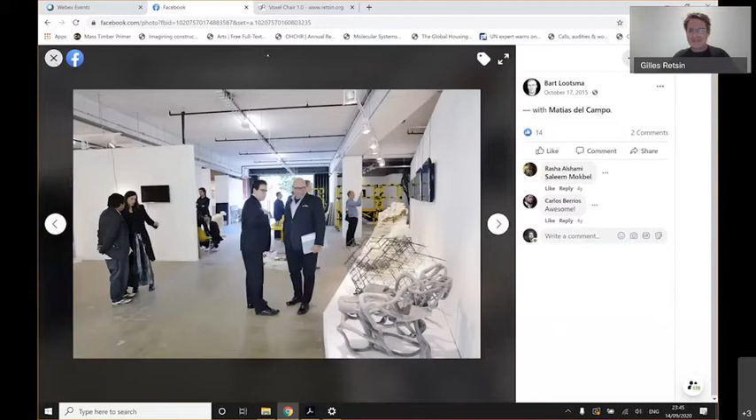So anyway, the talk today—I'll just go into full screen. I'll set a timer so that I don't keep you forever. I mentioned to Evan before that usually when I go to the US, I'm extremely jet lagged by the time I have to do my lecture. This is almost the same—it's like 12 o'clock at night in London. So similar vibes, a lot of coffee.

The title of this talk is just Discrete Architecture. I was thinking about other titles, but ultimately that's what I want to discuss with you—that premise of Discrete Architecture that Evan just brilliantly summarized. I made a whole sheet of notes: sublime incompleteness, hyperfigurative objects—nice terms. The lecture is split into three discrete blocks: the first, Great Expectations; the second, Irresponsibly Naive; the third, 99%. Roughly speaking, the first chapter is about architecture, the second is about technology, and the third is about the socio-political premise.

Usually my lectures are the reverse—I start with almost a cross-section of the current context we inhabit, explaining where the work comes from and what it promises, and then I show the work. And then usually I run out of time and can't talk about architecture in detail. So for this opportunity, I've switched around my lecture for the first time. We'll start with a kind of architectural journey, and I'll try to go into detail there. Then we'll talk about technologies, and then the premise. So this is an experiment—we'll see how that goes.

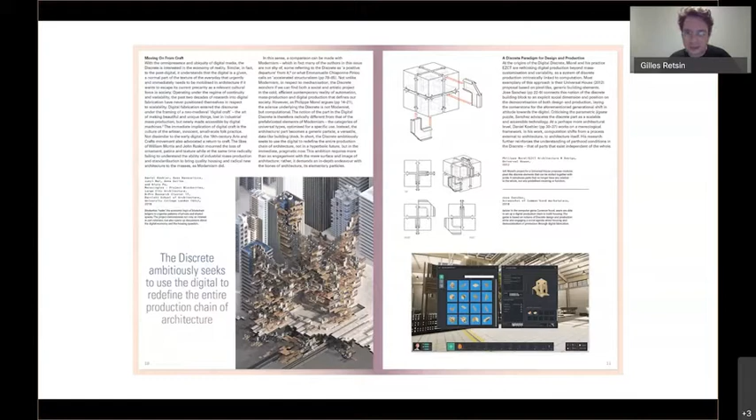So it looks chunky, it looks maybe fuzzy, it looks blurred. There are definitely no continuous surfaces. There are no defined superforms. It's maybe a bit moody and a bit dark as well, all in the opinion of Pinterest. We see also work here of other practitioners like Casey Rehm, who I believe was also for a long time at RPI, now at SCI-Arc, or people like Daniel Köhler.

I want to start to give a few tools to understand what the discrete is and how we should discuss it. You could understand the discrete purely from a data perspective. It's a mathematical idea of how to organize data. Analog data is continuously differentiated. It has no parts. The equivalent would be an analog clock where a mechanical dial moves around in a circle. There are no precise digits, but it continuously differentiates. It's analog. And then the digital is data that consists of discrete bits.

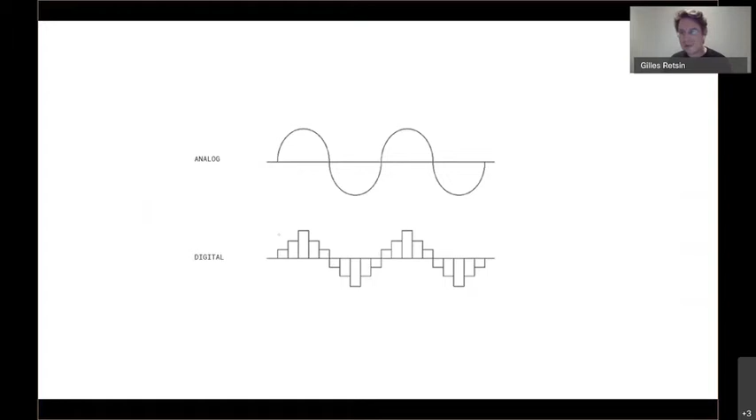So the digital and the discrete are inherently linked. Not everything discrete is digital, but everything digital is based on discreteness. So that's maybe a very boring slide to start with, but I think it can take us quite far. Of course, it's an absolutely naive and perhaps stupid idea to try to divide all of architecture into two polarities, being either discrete or continuous. It doesn't really make sense to do it, but a lot of these things are productive to do.

The discrete and the continuous, I think in architecture, that debate has always been there. It's a fundamental issue. It's not a radical dialectic. Depending on how you look at and analyze projects, you will always discover a relationship between the discrete and the continuous. But just for the sake of the polemic and the argument, we are going to do a very polar division in architecture. We'll divide it in two parts.

It will be either continuous or discrete. So what you see on the left is a typical example of a continuous analog building. Beautiful shell by Felix Candela. This is a building that consists of one part. It's therefore also just a whole. It has no subcomponents. It has no parts. It's cast in concrete, right? So it's just a kind of one large object that you create.

It's also finite. It's completely defined by a finite superform, and it cannot ever expand. It's completely finished in time. It can also not ever be partially built. You need to build it all at once because it needs that kind of superform to hold up from a design perspective, but also from a structural perspective.

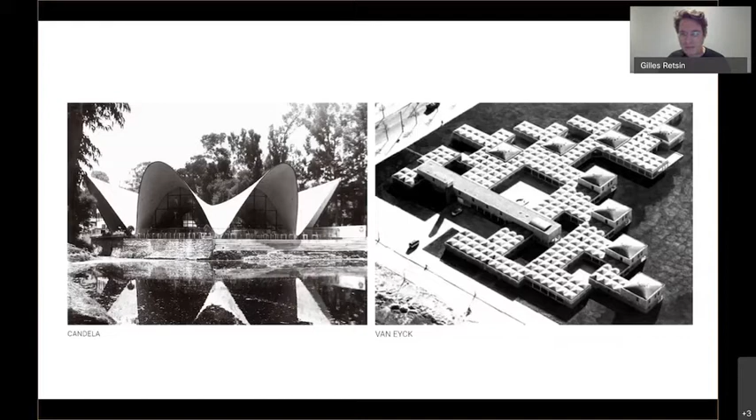The building on the right by Van Eyck, the orphanage, is a very different building. That's a building that is discrete. It's not digital discrete, but it's a discrete building. It consists of parts or modules that aggregate together. And the building, you can easily imagine that it could expand over time, that it could contract. You could even maybe disassemble it and assemble it in another form on another location. Both, by the way, key buildings from the modernist era.

But you could also go further in time. And I kind of made this up first as a bogus argument. I never did research into these arguments, but I made up this argument that architecture in the West had been traditionally continuous because of the fact that it was largely built out of stone. Stone is very heavy. So the only way you can create larger holes with stone is if you rely on geometry and form. If you want to build with stone, you need the form of the vault to be able to build in stone. And then you can of course go to the Gothic, etc.

So I launched this argument to a proper architectural historian, Mario Carpo, who then promptly told me that I was right. So this is now an official historic argument. And these are just some more subtle hints, traces of discreteness, just to show that the idea is so fundamental and so old.

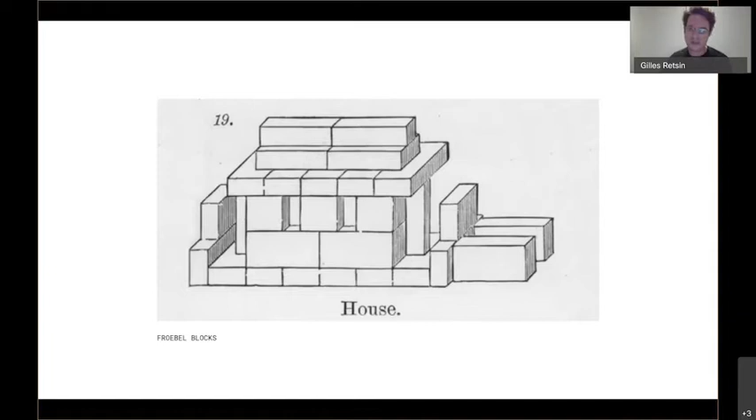Of course, Frank Lloyd Wright, you probably all know the textile block project, which in a way is also a nice precedent for the discrete, because it consists on one hand of a series of extremely beautiful and unique villas, but at the same time had the premise that it could become a construction system also for larger groups of people, and that other architects could get their hands on these blocks and also design with it.

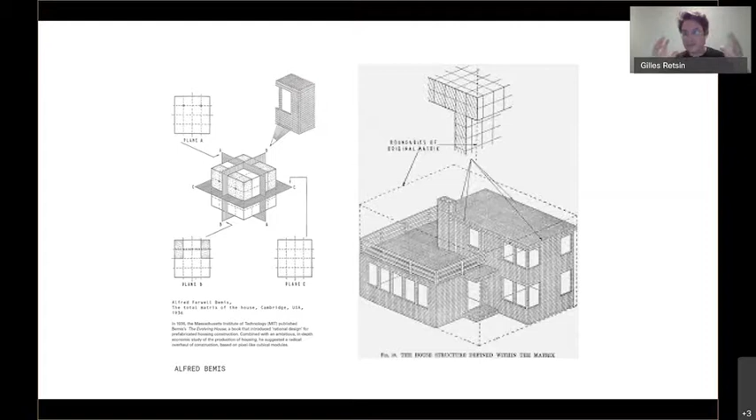There's also more obscure references like Alfred Bemis, who was a kind of crazy scientist operating at MIT in the 1930s, who wanted to standardize all of architecture based on a cuboid, or a voxel we would say today, and developed these super interesting voxel-based construction systems. Then more recently, people like Philippe Morel, who already in the early 2000s designed this Archizoom, Bemis-like universal house that consists of pure pixel-like modules.

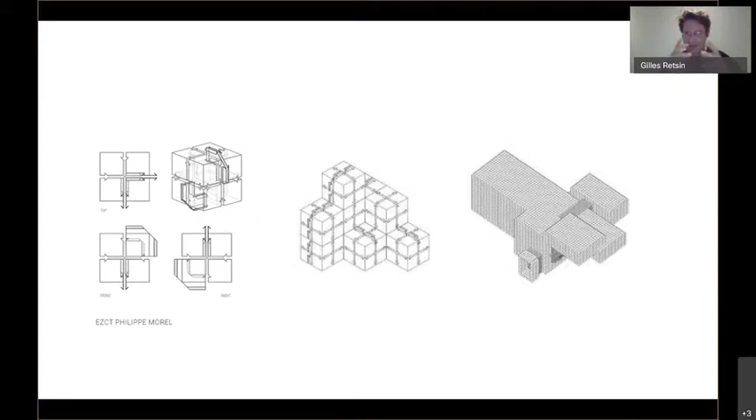This is the more vulgar explanation maybe of the discrete. So if, as a child, your parents would have given you toothpaste to play with instead of Legos, then you would operate in a continuous analog paradigm. You would be extruding toothpaste to build little towers or little structures. You would be operating in a continuous space without parts, and you would always be constructing a single whole. If your parents, like probably most normal parents, would give you Legos to play with, you would have operated in a digital paradigm, actually.

Even as a small child, you would have been confronted with the digital discrete, because Legos have a limited set of connection possibilities, almost like precise bits and pieces. You can only position them on those limited connections. And every structure you would have built with Legos would always be in part-whole. It would always be a kind of incomplete whole. You would be engaged in circular economy. You would be assembling and reassembling your Lego blocks, and you would be developing design paradigms on top of these Lego blocks. That would be your unique position as a child.

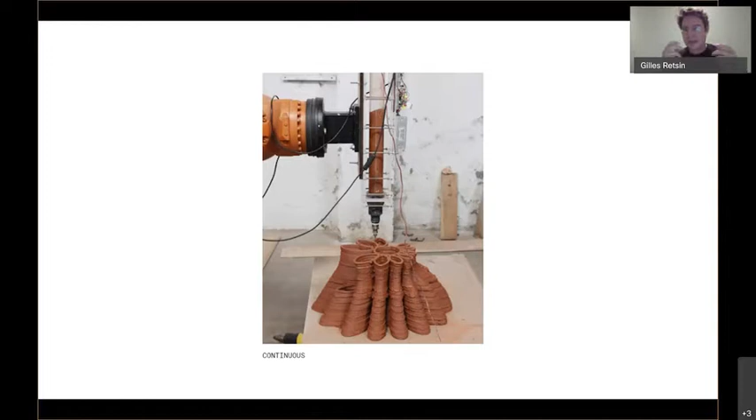Ultimately, just as Felix Candela's shell that we were looking at in the beginning, this model has a final state. It can never be reassembled, or we need to break down the clay again to its basic particles. And this is a bit of a confusing one, and one of the last ones I want to show. You can try to guess with me, is this now discrete or is this continuous? So it's a brick wall assembled by robots. It consists, of course, of discrete bricks. However, the final outcome is actually continuous.

Now, why are we talking about these things? And that's maybe the great expectation. The interesting thing is that while discreteness and parts have been around in architecture for ages, along with the conversation on modularity, or the disciplinary discussion of part-to-whole relationships, we have never really thought about part-to-whole relationships or about architectural parts in a digital way. So we have worked with discrete elements, but we have not necessarily considered them as digital parts. I will explain a little bit further what that actually means. But that is an exciting discovery.

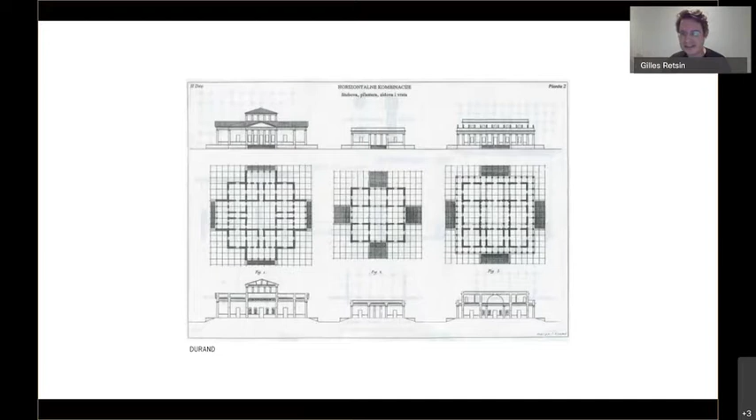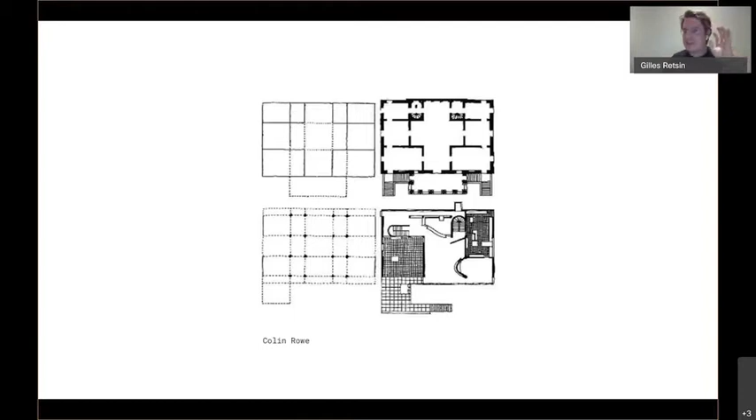Because in a way, it's a creative question. When Colin Rowe, in his famous essay, was analyzing Villa Stein by Le Corbusier and comparing it to Palladio's villas, he was making the argument that we had never been modern. That actually Le Corbusier's villa was just a white stucco or concrete version of Palladio's villa. We were still relying on the same geometrical grids, on systems of proportions, and on elements that had specific functions like columns, walls, grids, etc. So fundamentally, we had not yet been modern. We had not been able to separate form from function, which then, of course, Peter Eisenman's career was founded on: the attempt to disconnect form from function and to break that modernist assembly.

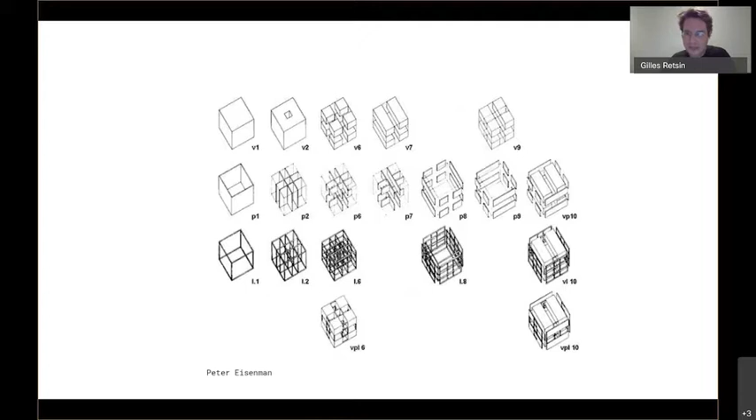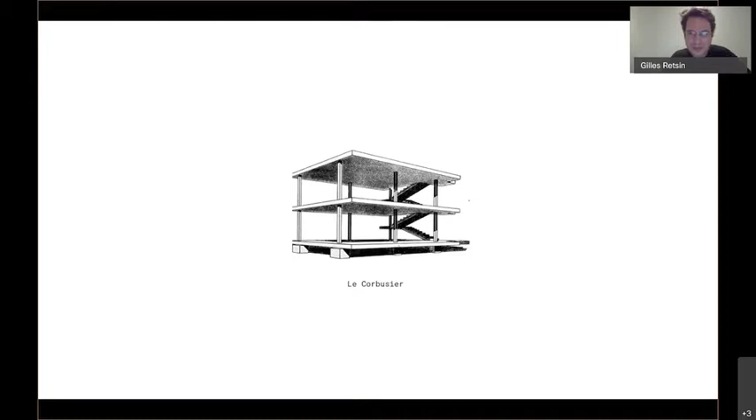And that is interesting because in many ways I have been obsessed by this model, Le Corbusier's Maison Domino, which is extremely resistant and extremely difficult to get rid of, right? This original model, which we could argue is not even modern, is still persistent in architecture. And there are reasons for this. This is another one of my made-up blunt histories that are very wrong, but also I think entertaining.

So this diagram is showing the entire history of architecture, at least in the West, where if you look really far back, you would be in a pure assembly of parts, and then you would be in a moment where you would be stuck in stone construction between solid walls, and it would all be based on the wall. And then what the Domino did was flip that inside out. Like I always say, the Domino flipped architecture inside out. It got completely rid of the wall and everything became about the floor.

And that persistent model is still there. It underlies still most of our architecture today, or it affords us to do what we do today. So this is another one of my historical diagrams, which contains architecture history in the last century, where you see the domino, and then you see the attempt to get rid of the domino with postmodernism, where we try to diffuse the domino with figurative elements.

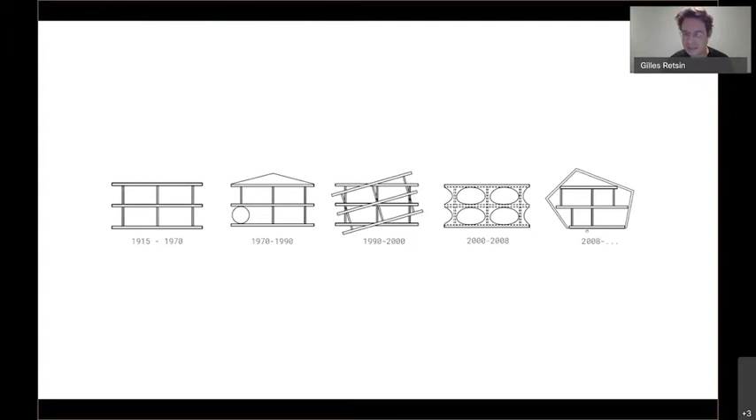Then we see Peter Eisenman's attempt, the decon attempt to get rid of the domino. Then we see the parametric attempt to get rid of the domino, where we clad it with curved panels, to give the impression that the domino is gone, but it's still lurking behind the surface. And then maybe a more recent one, very much in the US actually, the triple O object-oriented ontology paradigm, where we try to make a building appear as an autonomous object. But again, if you look on the inside, we'll see that it's afforded by the domino and sliced into a series of layers.

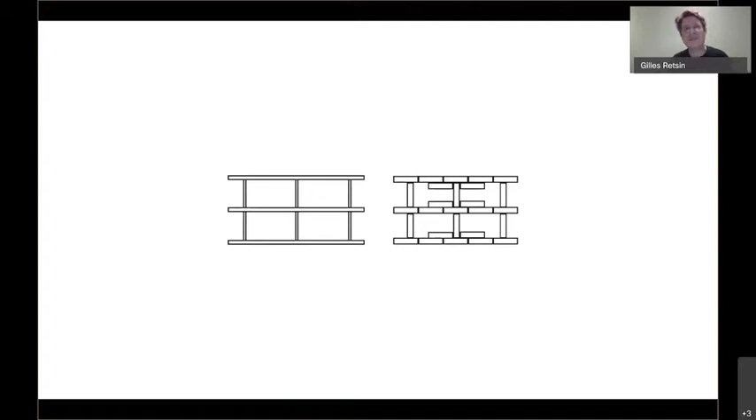And that is, I think, if you look at all art and maybe literature, what happens. There are great expectations at the moment that something reaches its high point, its technical summum, then a next generation would dismiss the expectations and the description of that technical summum. For example, in high Beaux-Arts painting, they would paint the most technically perfect and incredible paintings, and then someone like Cézanne or early generation impressionists would come along and dismiss the entire technique and just rewrite the rules.

So that was a little bit the attempt in architecture, to do this shocking move to say that it's not anymore about form, it's not anymore about the super whole, it's no longer about geometry, it's no longer about mass customization. From now on, it's only about parts. And that's the diagram that shows the discrete, and it's deliberately a provocative diagram, where we have a series of parts that are all the same. They don't have any function or precise meaning, and are articulated in a form that looks quite similar to the domino. Yet the argument is that this is not a domino. The argument is that this stupid diagram is more radically different than the domino than any of these attempts.

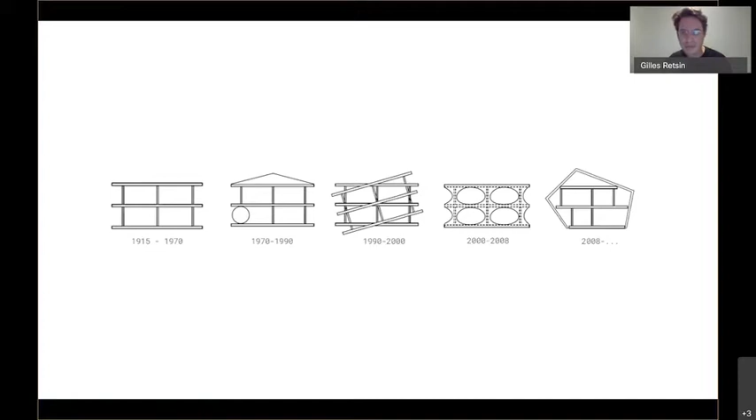All these attempts have never managed to get rid of the domino. They've tried to diffuse it, they've tried to hide it, they've tried to wrap it into objects. But actually, this attempt gets rid of the domino. There is no more domino. There is just an aggregation of parts that are always repeating parts. There is no floor slab, there are no columns.

I don't know if you can see my mouse. Can you see that little mouse hand? Otherwise, I need to describe that.

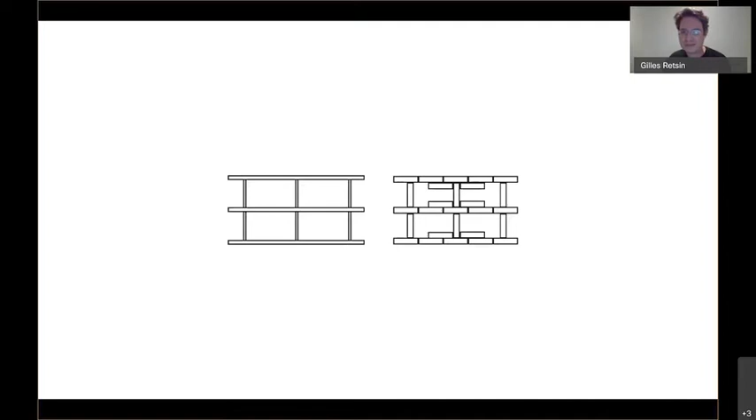But anyway, the column that you see here is not actually a column. That is actually the same element that appears here in the horizontal plane. So ontologically speaking, everything in the diagram on the right is different from what you see on the left. So we got rid of the domino. So that means that we need to design. The premise of a digital discrete part would be that the part has no prescribed function, that it always remains autonomous, and that it never derives its position from a super whole. It will always derive its position just locally, and it will always remain discrete and autonomous within an assembly.

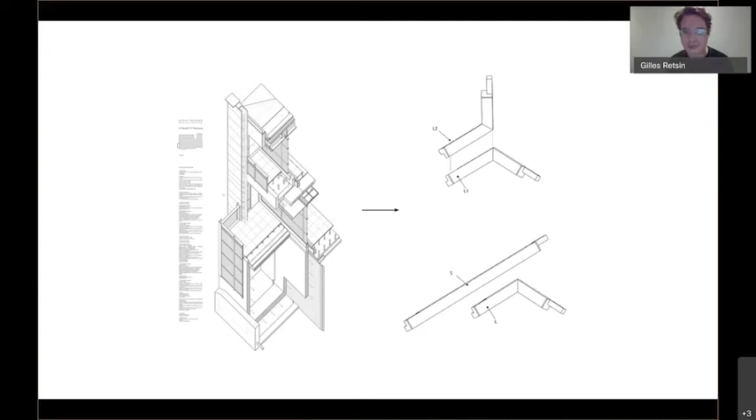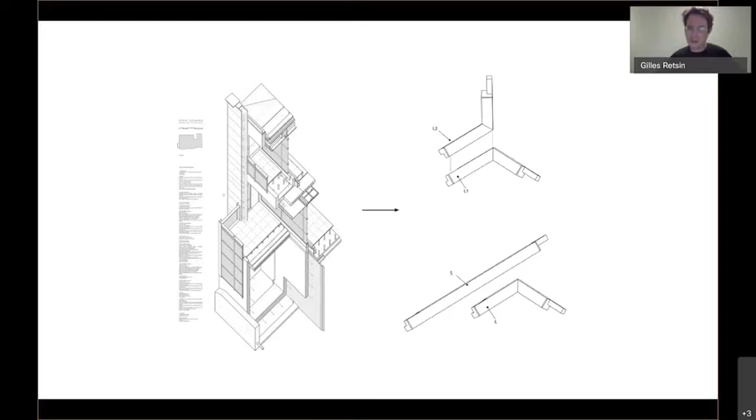And the premise is then basically that while doing that, on that journey, you could get rid, and we'll talk a bit more in the next chapter on technology, you could also then get rid of this kind of terrible world that the Domino has brought us into, right? So the Domino has flipped architecture inside out, and it has given us a world of commodified building elements, of curtain walls, of commodified, terrible PVC window frames, and a building industry that is an incredibly slow and old-fashioned world. But more about that later.

So what does that look like? It could look like this. So this is the first project that I started working on that approaches the discrete. That's in 2015, if I remember well, so roughly at the same time as the chairs that we were looking at. This project is called the Stone Villa, and it consists completely of repeating arrow-shaped elements. And it was a kind of naive premise, basically. It's a project in Belgium.

It started out with a former classmate who became a climate consultant and therefore earned a lot of money. He approached me and was like, I don't know what to do anymore as an architect. Can you please design a villa for me? And he was asking it jokingly, because he knew that I had just graduated from the AA and was teaching at the Bartlett with robots. So it was more like a teasing question rather than taking it seriously.

So I was like, yeah, sure, we'll give you something, and essentially the argument was it will be based only on a hyper-rational argument of a single repeated part. You will not actually have to pay for any crazy customization. We'll just prefabricate that one part, we'll aggregate it, and you will have your villa there. So we made this huge model. We cast a few thousand of these pieces.

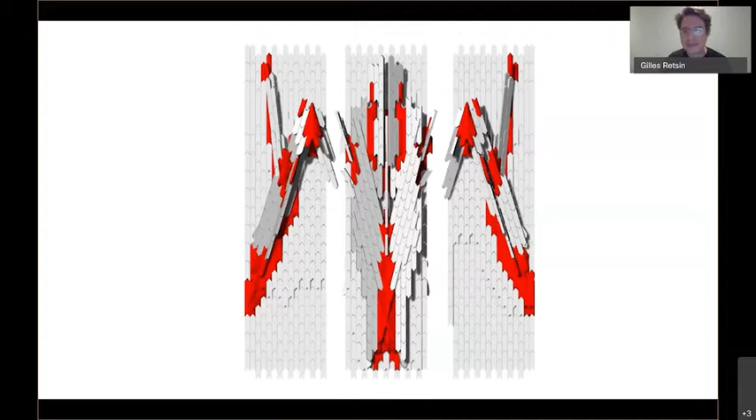And the argument was then that everything that you see here in white is that repeating part, this repeating arrow element. Everything in red are customized zones. So it wasn't entirely as radical yet as it could be. The argument was, look, 90% are these white parts, and you will have to pay a little bit extra for these 10% zones that maybe we need to customize. But ultimately, it's a very rational proposition.

So these repeating elements would come together on these customized parts, which still, by the way, it's more like a complex Lego in a way, they still use the same modular connectivity, but they allow us to switch or flip grids. So this is one of these strange chunks from that model. This is Nathan and Manuel working with me on establishing that massive model in the office.

And then the resulting architecture is something that is still, I think, until today driving my practice. And that's why I really start with this project, because I think the premise that this model contained is really powerful. It showed that you could work with seriality and with serial repetition, but that you could push it away from the boring, modular, hyper-rational and cold project that normally we associate with modularity and seriality.

It showed also that you could bypass geometry and topology and surface, but that it could become volumetric. And aesthetically, I think, it shows something that is assembled yet organic. It has a natural feel, yet at the same time it's also assembled. So that for me was as a proposition really interesting. I absolutely had no clue how to build this. This was also a pure naive exercise.

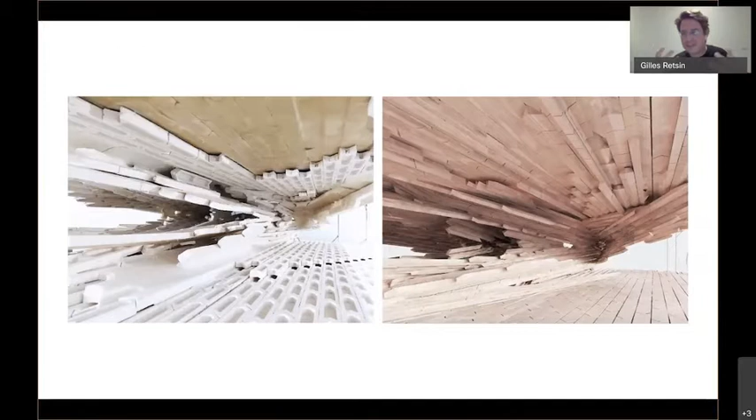Ultimately, we had to add a layer of carbon fiber, of glass fiber, on the model to make it hold up, because we were constructing a horizontal brick wall, which is an embarrassing stupidity as an architect to try to do, obviously. How can you stack bricks horizontally? That just doesn't work. So we had to add this layer of glass fiber, which obviously is continuous, in order to make this stand up.

However, despite this kind of criticism, I think the office has tried subsequently in the next few years to make this happen, to build in a way on this proposition of that image. Now, one of the benefits of that discrete project is that, of course, this villa did not get built, and ultimately the client decided to build another project. But then we could also play around in the next series of projects with the same parts.

So this is a museum at the Karlsplatz in Vienna, which we did as a kind of provocation for the competition, not seriously with the premise of wanting to win, but more as an exercise to explore how the design principles could scale up. This plays the same game in that we have a familiar form of the slabs, which is also a provocation, that there's no interest in curvilinear, topologically complex space. This is a very boring building, one that consists of 3 horizontal strata, but all of the qualities are derived from the interaction of these parts.

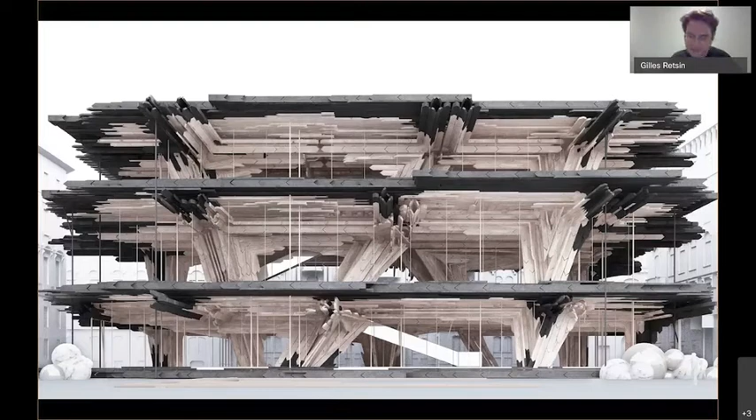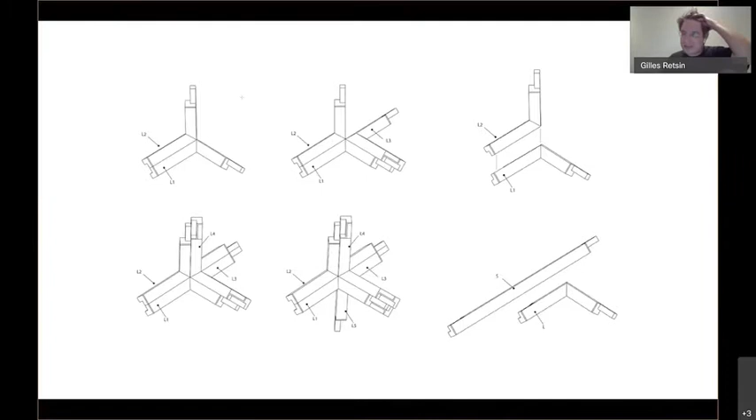And then ultimately, of course, we didn't do that competition, so you could do a table as well with the same element. And then the next project, which I think is probably the one that keeps the practice going intellectually and creatively, was also done in 2015. That was a proposition for a multi-family home in Belgium, basically 3 apartments stacked on top of each other. The idea here was to really do a proper discrete building.

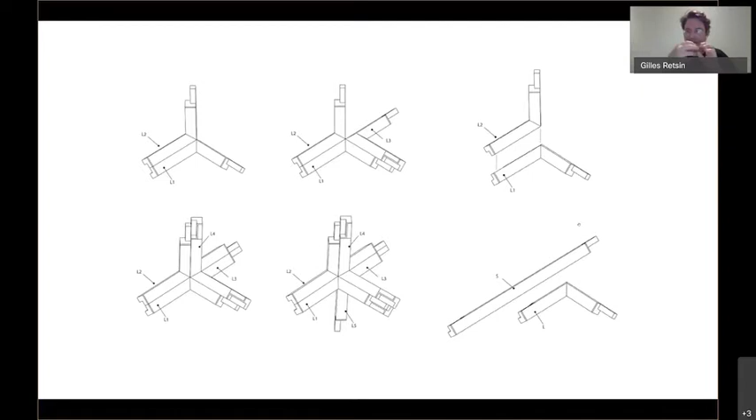So we would not use any additional materials such as glass fiber or tension. We would actually begin to think about how this would structurally work. We would not use any customization. We would really just build the entire building out of an L-shaped part and a straight bar on 3 different scales. So this is the project that came out of it.

And again, there's a kind of argument here, and I think Evan hinted a bit that it's a very different argument from the continuous project, in the sense that this looks excessive, but it is not excessive. It's highly, highly economic and rational. It's a purely modular project that only consists of repeating parts. They're not actually materially excessive. These parts are hollow on the inside. They consist of thin timber sheets. So it's not that there's an enormous amount of timber in the project.

It's actually relatively lightweight, and a project that is ultimately really boring. So it's deliberately articulating itself almost as a kind of domino, a stack of 3 horizontal strata that are then materialized with this cold and relentless repetition of the smaller elements. The small elements remain always autonomous. So when we look at this, we register this figural aspect of these parts, like we're looking at the L-shaped patterns that they create. It suggests almost a building that you could call an incomplete whole, but I don't like that term so much. I would say it's more like a part-whole, like it's never fully complete.

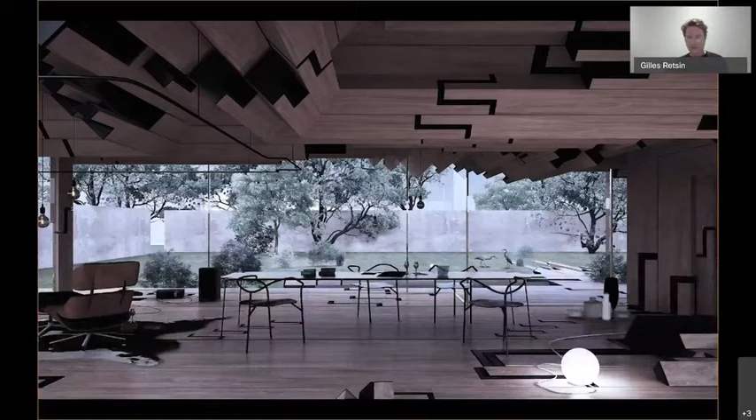It's not, we could easily add or remove another part. We could maybe imagine that it could expand a little bit further. It's very fuzzy in its definition. It has no facade, it's very sectional almost, it's almost like we've sliced it. It has a very strange quality to it, that when you look at it long enough, you understand the rationality, yet of course it's beyond normal expectations. And these are some of the interiors of the project.

I think that also reveals a few other interesting aspects. I would actually argue that this space is phenomenologically continuous. So while it consists of discrete elements, it is actually a continuum, although it's not curved, but it's a continuum in the sense that it's a repeated operation of the same part. You have the same part in all directions where you look. It's in the floor, which is not actually a floor, it's just an aggregation of parts. It's above your head - in my projects there are no columns, there are no beams, and no ceilings, but we don't have words for it, so I have to say it's in the ceiling. However, there is no such thing as a ceiling. It's just a series of parts.

And what it also does, in terms of inhabitation and domesticity, is give a little bit the impression almost as if you would be in a forest or a cave and you go camping and you domesticate the space. So there is nothing in this space that caters to human inhabitation per se.

It's absolutely dysfunctional. This is not a functional space. The elements have no function. A floor has a certain function, a column has a certain function, a wall has a certain function, but these elements have no function. It's only after their aggregation that you could say they maybe establish functions as an emerging property, but in themselves they have no function.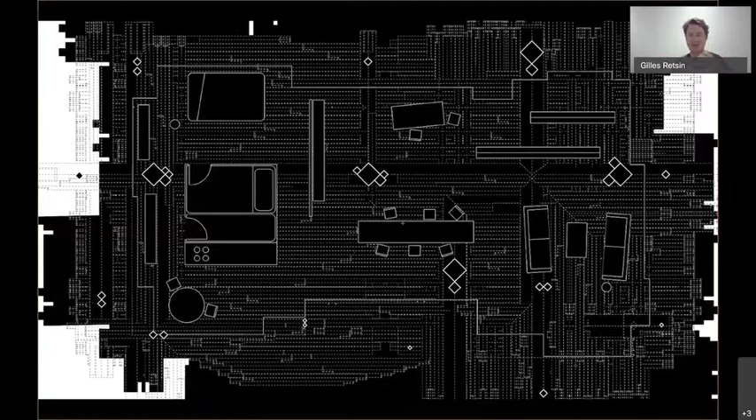You can see also in the plan the kind of loose plan. There's just a kitchen volume here that contains the bathroom, the kitchen, toilet, and then the rest of the space you could organize however you want. There is no kind of functional premise from the top down in how you need to inhabit this space.

This is the plan, how it sits between the walls of the garden, and it becomes this very blurry black object that is between a reflected ceiling plan and a figure, and it kind of disappears in the garden.

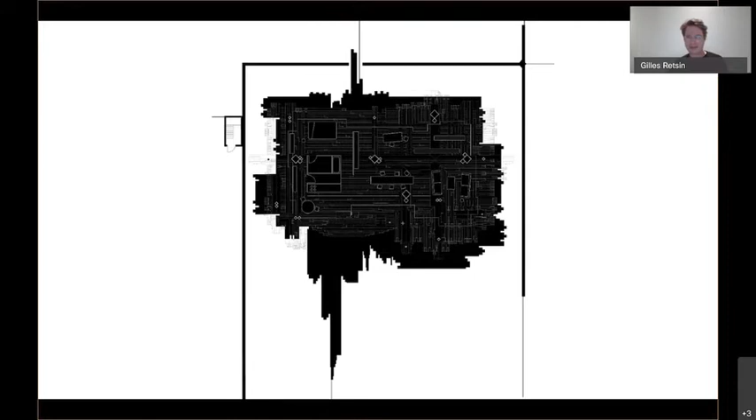And you can read it as doing this primitive move, wanting to construct a horizontal plane and a kind of column-like element, yet there is never, even structurally speaking, such a thing as a column.

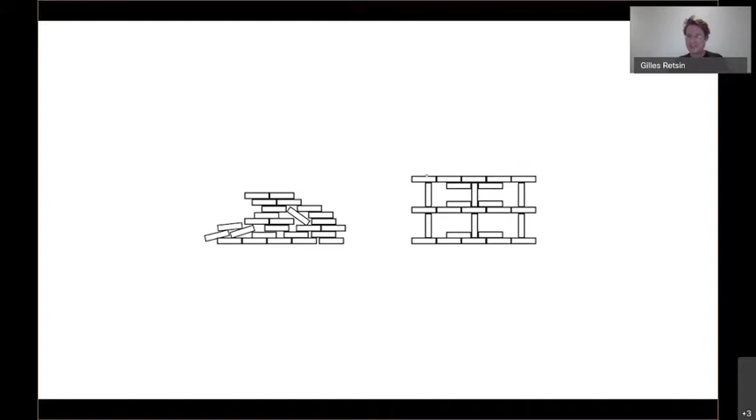So this one is a very illogical and weird thing to do, right? Because you are confronting, you have to resolve certain difficult structural questions when you want to do this operation.

So recently, just as an exploration, I have not shown this to anyone. You are the first ones to see this. This is a project that I called the Rockhut. So after I did the Blockhut, this is the Rockhut.

The Rockhut is trying to do a project that works more on homogeneous distribution of forces. So structurally speaking, and if you talk with engineers, a more logical discrete project. You accumulate a lot of mass, and therefore in all of these parts, they never get put into difficult moments where one part needs to carry a lot of load or needs to cantilever. This is a more amorphous, rocky project.

Very blunt. And I think it does something really strange that again has the same quality as the original Blockhut project, in that it is half natural, half assembled. It looks a bit like a rock, yet it also looks strangely like a Florentine Renaissance experiment with a kind of rustication.

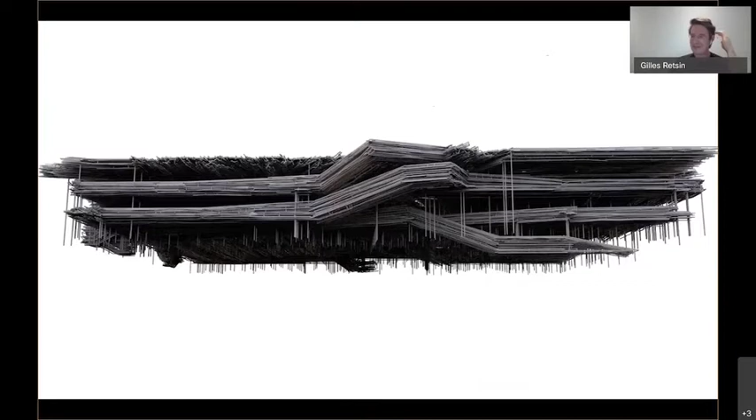But this one is also, I think, a much older project, before this radical discreteness came in. But I think it has this same aesthetic idea as we were talking about before - it is a continuous repetition of the same operation, although not as obsessively discrete as the recent work, but it is a familiar form that is dissolved with thousands and thousands of non-functional elements.

In this case it's very gestural, almost - I like to compare it with abstract expressionist painting, where it's a continuous operation, almost like a brush stroke, you could say, that is put on - instead of the canvas, the slab acts as the canvas, right? So there's this kind of minimal operation.

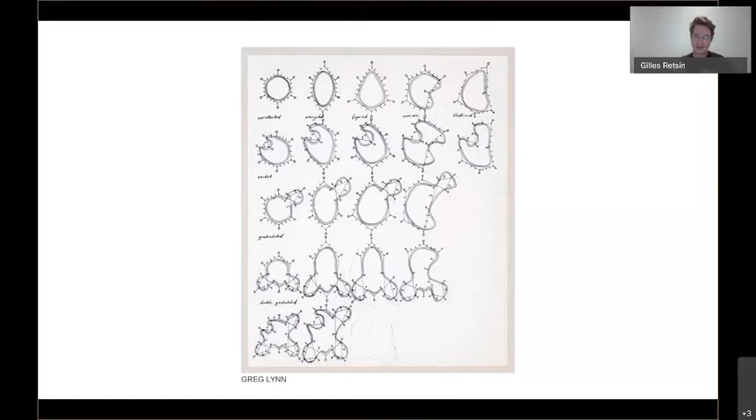And of course Evan hinted a bit at that in the introduction. This work is kind of the dialectic, or seems the dialectic opposite of the previous digital work, which was based on exactly the premise that there would be no more parts and no more assembly. And that was Greg Lynn's premise, of course, in Animate Form - that architecture could exist without part-to-whole relationships, that it could be one object, one whole, that would continuously fold and expand to create space and structure.

And of course, if you compare Greg Lynn's curve, and I think this is a very interesting exercise. So Greg Lynn drew the modernist curve as a discrete curve that consists of parts. These parts are universal, so it's a circle as a geometry, and then it's assembled into a curve. And then Greg Lynn's curve, this premise of the early digital, is a curve that has no parts, that is continuously differentiated, and that can never be mathematically described, it can never be described down to a bit.

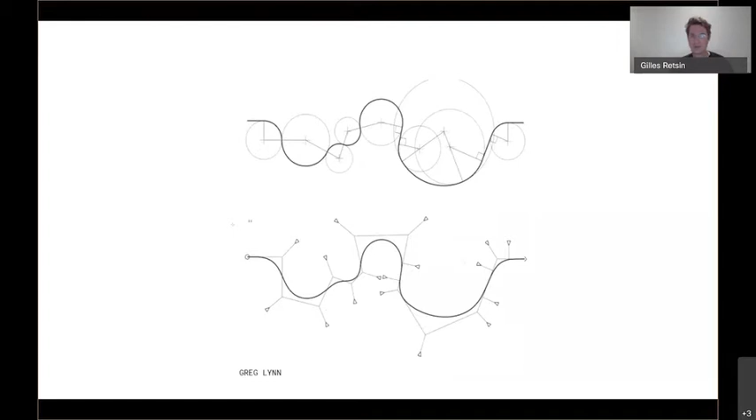So this is my provocation for that work: the discrete is establishing another option for architecture to develop that is different from both modernism and the early digital. But it's complex. I would like to argue, and that's something maybe we can debate, that it's not dialectical to the early digital, and it's not dialectical to modernism.

So although it seems antithetical, it seems like it's the exact opposite of the continuous early digital project. Early digital has no parts, the discrete has parts. The early digital is all mass customized, and the discrete is not mass customized in its parts. However, it is not dialectically related in this sense that it is not

a modernist project. A modernist project would believe in objectivity and universality, whereas the discrete project actually takes on board the idea of subjectivity as we find it in the continuous project. So you would not say that there is a universal part that works for the entire world. There would not be a fixed typology that we all need to live in, the equivalent of the Maison Domino. There would not be a fixed cell,

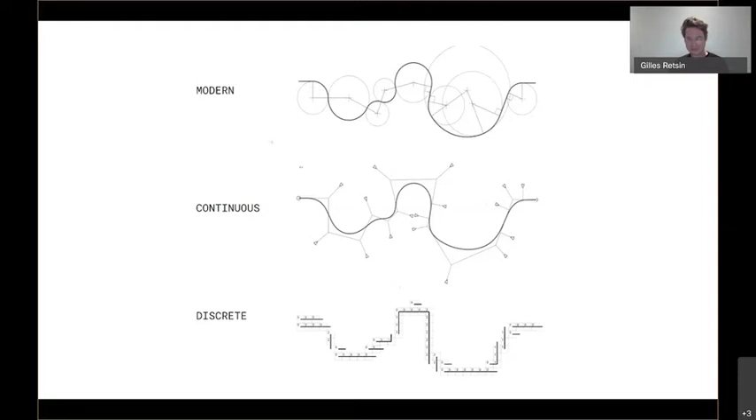So if we then look at this curve, we can play around with it and reveal some interesting properties. One is that the discrete is scale agnostic. You could do a discrete project on this resolution if you have budget and machines that can enable this project, but you could also do it at a lower resolution without throwing your ideology overboard. It's scale agnostic, which is something super strange, by the way. Again, something we need to discuss.

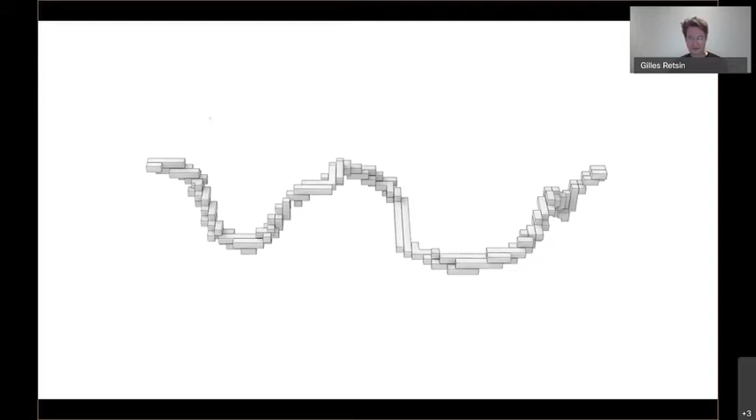It's also non-geometrical in the sense that this curve that you see here is not defined by a surface or by a strict geometry. To make it three-dimensional, you just add one array. So instead of a double array, you do a triple array.

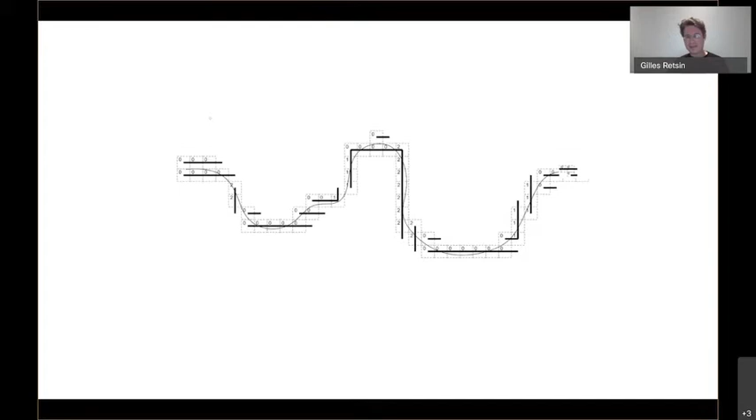Yeah, and then again, it's scale agnostic, right? So you could begin to question, like if you look at this image, if you lower that resolution, we almost end up in a kind of Miesian plan, right?

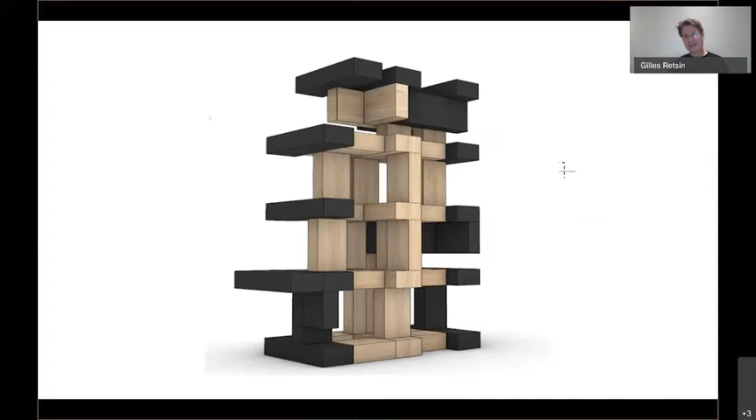And this project is also one that I have never shown, brought to you exclusively tonight. Again, just a Rhino screenshot of a recent project, which is very, very blunt. It's just an aggregation of box-like elements, which would almost fit at this kind of resolution, right? They're huge elements. I mean, you can kind of imagine it yourself.

There's no scale in this, but you can imagine the scale. Maybe you do it subconsciously. Keep in mind you need to be able to walk under that beam on the top there, so maybe bigger than you think. But for me, this is a very interesting moment, an extreme reduction of the amount of parts.

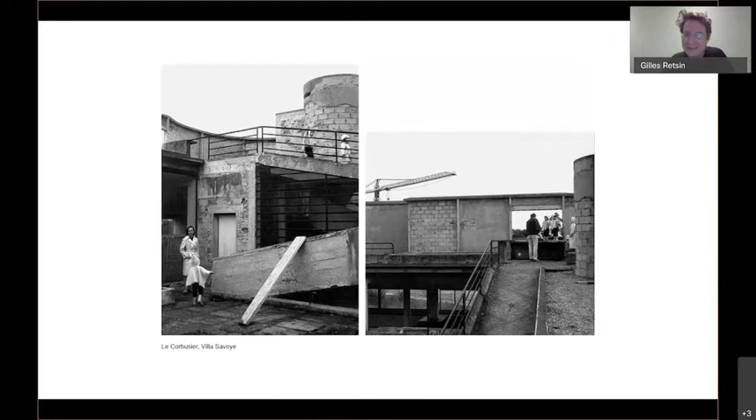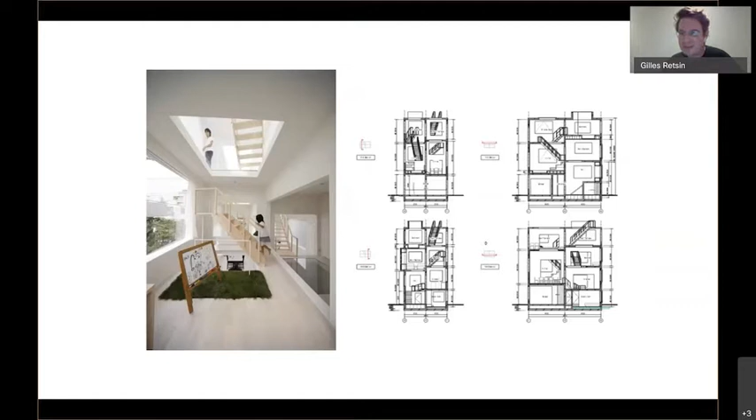This, however, Sou Fujimoto's House H, I think this one is. This one we can do, right? This is a house that has a strange relationship to scale. I believe it's relatively similar. Sorry, I'm just going to flip back a second. We cannot do Toyo Ito, but we can engage with something like this if you want to. We can also look at this other one. I'm just showing you my favorite houses now. We can do this as well. This is by Emilio Tuñón.

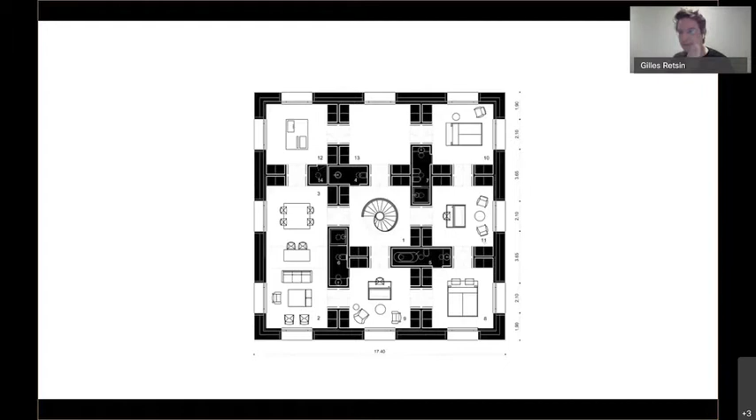The interesting thing with the discrete is that in a way it's scale agnostic, but it's also agnostic to architectural position. You could decide to arrange your discrete parts in an uptight, rigid grid if you wanted to, right? That's a strange thing. You could arrange them like I do, which is kind of whatever, but you could also do it in this way, right? Technically speaking.

Or you could also access typologies like this one, which is, it just slipped my mind, Casa Mora. Yeah, the previous one was Casa de Piedra. This one is Casa Mora by Iñaki Ábalos, which is a functionless building. Very interesting as a precedent. There are no fixed functions. This can kind of be inhabited.

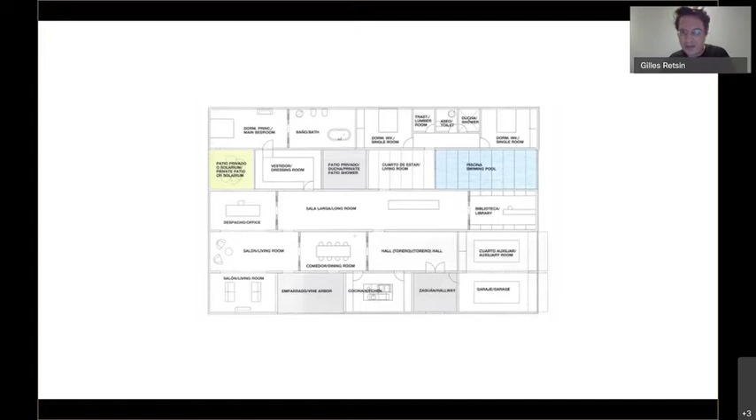And maybe we can debate that in the discussion, but my argument would be that there are many ways. I would argue that most architects actually secretly don't care about context, and that even Herzog & de Meuron's approach would be an idea that precedes context. So the discrete architect in a way becomes like a serial architect, like a serial killer, where you iterate through work.

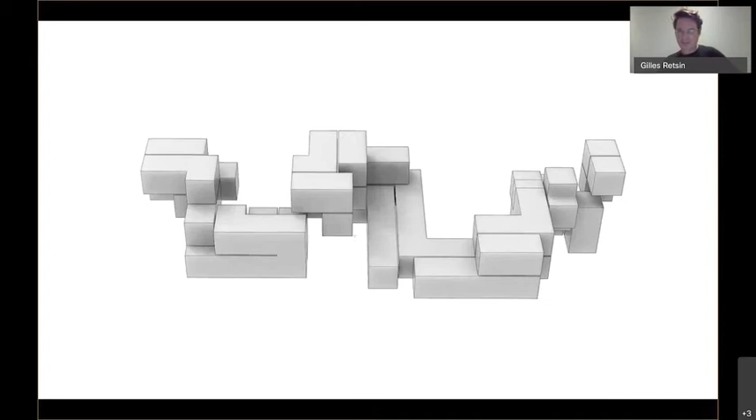Another kind of funny question related to scale is: how low can you go? How far can we push this idea of being scale agnostic? So if we keep reducing Greg Lynn's curve, ultimately we end up with nothing, right? With a straight line, a digital discrete straight wall, or this box, which would be a digital box if we reduce the resolution far enough.

And that's an obsession that I have recently developed, an obsession with scale. We're all, I think, fascinated by societies in the past who managed to build Stonehenge or the pyramids, this incredible feat; these are humans sitting on this massive building block. So I became extremely interested in working at this massive scale. This is a section for a museum in Korea where you see this extremely blunt and almost stupid section where you just have a few of these massive parts, 15 meters long, locked together to construct the roof.

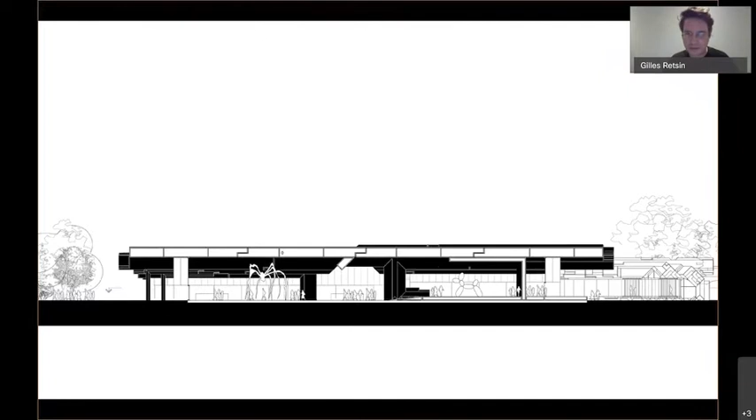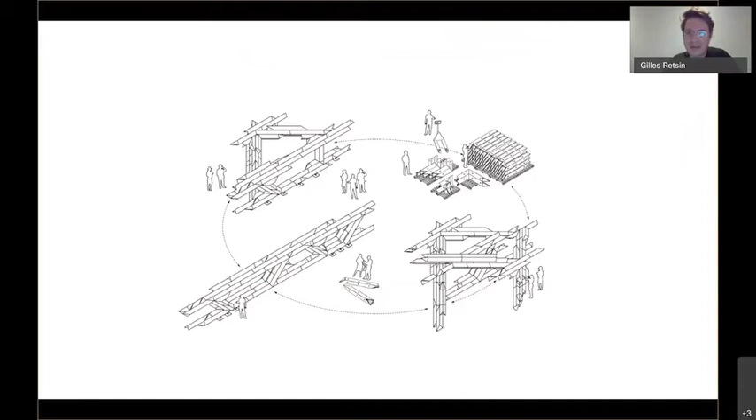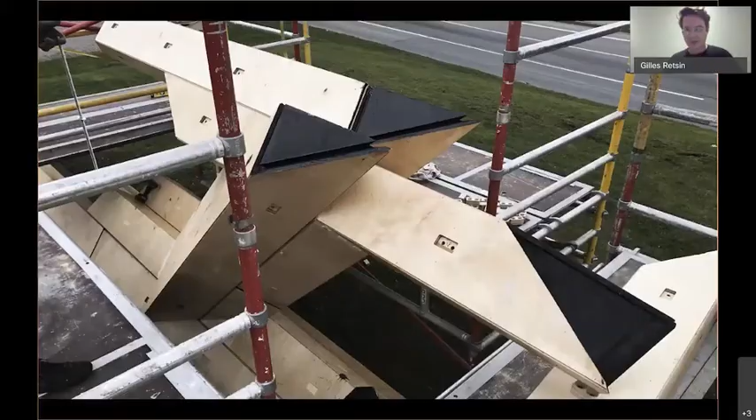So this brings us to chapter 2, but unfortunately I have spoken for almost 1 hour and I don't want to bore you or speak for another hour. So if I get 5 minutes, I will just show the concert hall. And I think by now you also know why the second chapter could be called Irresponsibly Naive. It was going to talk about the technological consequences, I'll skip this a little bit, of how ultimately we got this to work structurally and how we devised all of these technologies to make these building blocks operate as functionless parts. This is a more nerdy structural conversation running through a number of built works and experimental pavilions.

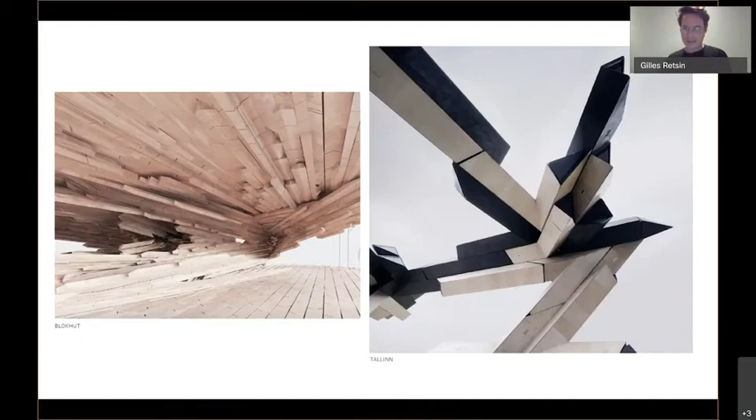Like this one. If you remember the Blokhut, this is the Blokhut that we actually, in a way, managed to build for the Tallinn Biennale. I would argue this project is very similar to the Blokhut. And also a conversation then about how we can deploy this for mass housing. And again, I like to do this comparison: the initial premise of the office to build the Blokhut, and then Tallinn, which is the built version of the Blokhut. So I'll skip a bit through this.

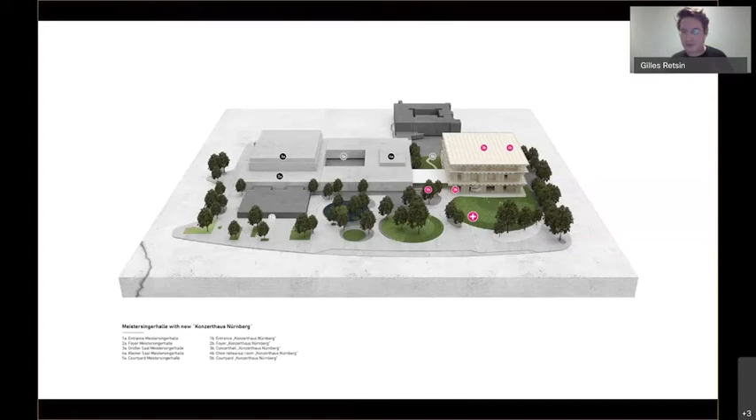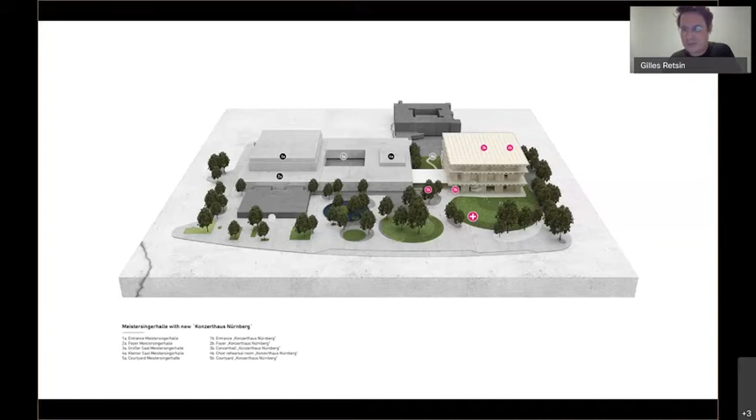So the last project, and I'll wrap up with this one, is a competition for a concert hall in Nuremberg. Germany is an extremely difficult country for competitions and for young architects. So we participated with, you could call it Pandora's box. We submitted in the first round of the competition an exact box because we knew that this would fly with the Germans. We didn't say anything about how we were going to construct this box. That was a secret; otherwise, we would not get selected. So we just gave them a glass box. We got selected for the next round, competing with 10 established offices.

This was me together with a friend of mine from Germany, Stefan Albrecht. So we were a two-man band against a whole series of larger practices. And our idea was really, Nuremberg is in Bavaria, it's a forested region. So the idea was to extract a concert hall from the forest, to make an argument that we could establish this extremely short production chain, that we could go to the forest, we could harvest the trees.

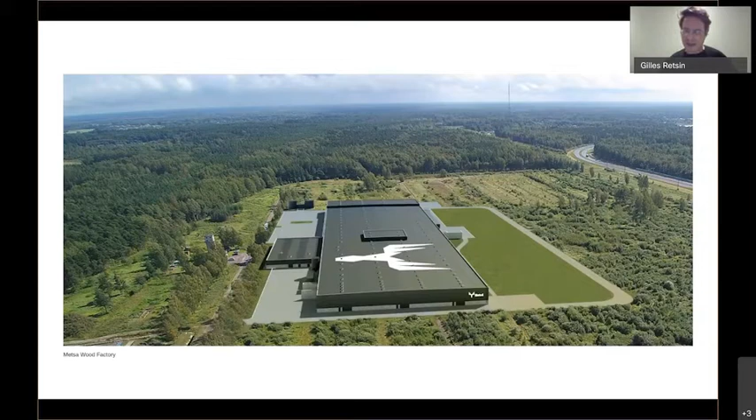These trees then go to, you know, the equivalent of Elon Musk's gigafactory, but this is Metsä Wood, one of the largest timber producers in Europe. Then in a fully automated workflow, the forest gets sliced into sheets of timber. It gets glued back into an engineerable product that we can buy, that we can put a price on, that we can calculate and engineer with.

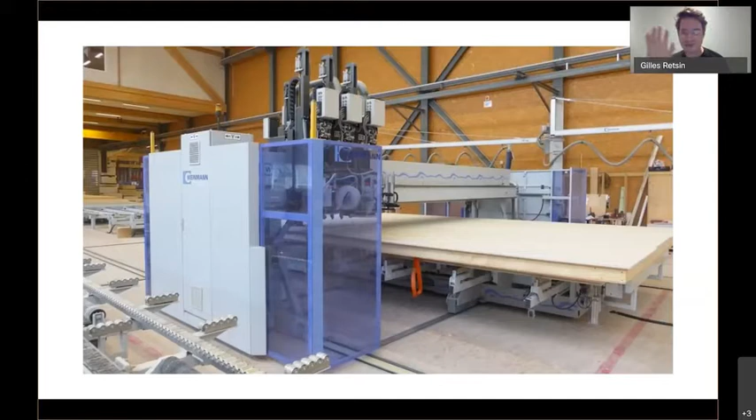We take those sheets, again, nothing of this is sci-fi, we run it through this massive CNC machine, and ultimately we establish this kit of parts. So these are all the elements that the concert hall consists of. None of these elements have exact functions. They're all derived from the same V-section, and they're all cut from the same thickness of timber, which is a 15 centimeter cross-laminated timber sheet.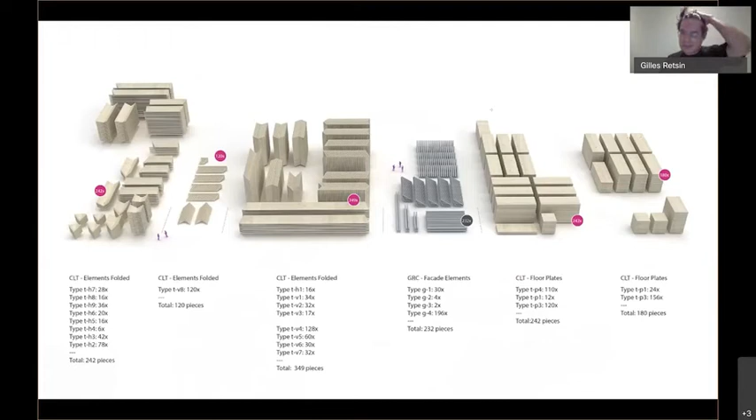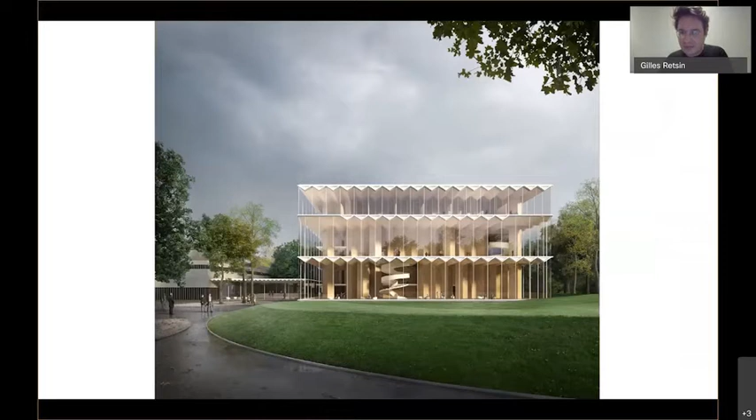You would cut all of the sheets, you would pre-assemble them into V-sections, ship them in a truck, and bring them to site. This is the entire concert hall laid out flat on the ground. All the parts you need to build your concert hall. That's again the process from digital, this extreme discreteness, actually, a very boring voxel space with all of these little fragments that can then be rationalized into a lot of timber sheets that are again repeating. And then that's the concert hall itself, looking at the entry.

And so what you see here is, again, an interesting argument to discuss. This is not a box. This building is not a glass box. There's no such thing geometrically as a box. It's a voxel space that at some point stops and is limited. But again, ontologically speaking, there is no box. There are also no floor plates and columns in this building. There's actually nothing in this building that you would know from any other building that is built. It only consists of the same repeating V-section timber elements, and it's exactly the same element that appears in the vertical plane as in the horizontal plane.

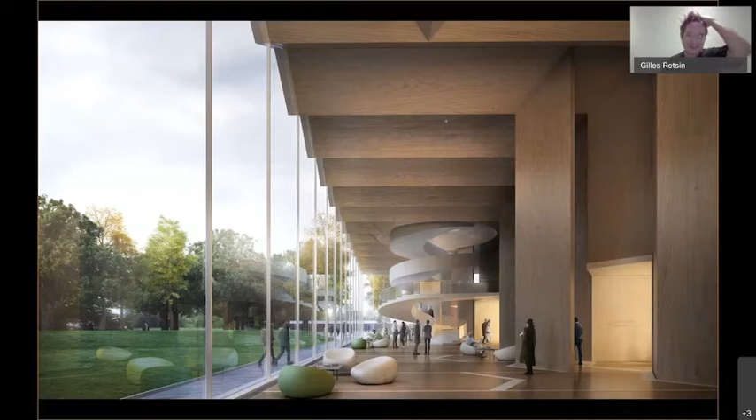There is no floor, so you walk from this triangular element, you take a step, and you land on the next triangular element. You walk over an edge between the two elements. There's no floor. There's no floor slab. It's just a building that only consists of autonomous parts. It's a completely organic building, I would argue. It's a timber monolith, a primitive timber monolith, where the same material operation happens all around you, just as the diamond's house that we looked at earlier. So this part that you see here is the same part that you see there.

Of course, the staircase is a notable exception that has absolutely nothing to do with the discrete logic, but it's a beautiful staircase. I outsourced it to my dear friend Isaïe Bloch, who also teaches at the Bartlett. I just told him to design the staircase, and we'll puncture it there through to the roof. You have these super joints that are expressed here in white. And then as a building, it's super, super simple to construct. It's almost no detailing. It's like detailing for kindergarten.

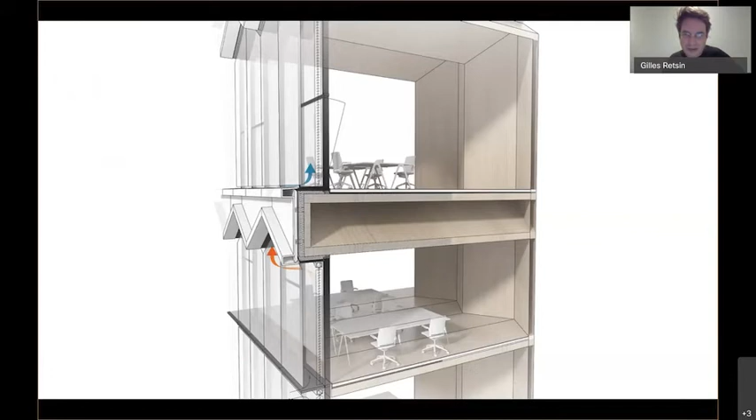99% of the building is just these timber parts that we have come up with. Then it just gets wrapped here with a layer of insulation. You add the facade panel on top of it. And that's the argument that ultimately there's this weird thing that architecture, rather than entering a hyperbolic future of glossy surfaces that maybe remind us of the car industry or spaceships, architecture through automation and this way of thinking actually returns to its super primitive core.

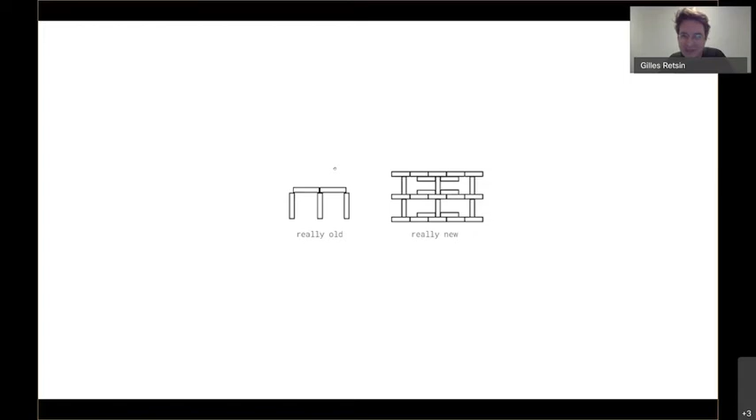Like it's directly from the forest to the building. It's a kind of automated primitive hut in a way. And if you remember this diagram, that really old and really new are in a way very closely related to each other, which is also the qualities that I think we can extract from the block hut. Or we could speculate about this, right? That in both cases, I like to also make this comparison, really old and really new are in a way closely related. And then this gets further explored in other projects.

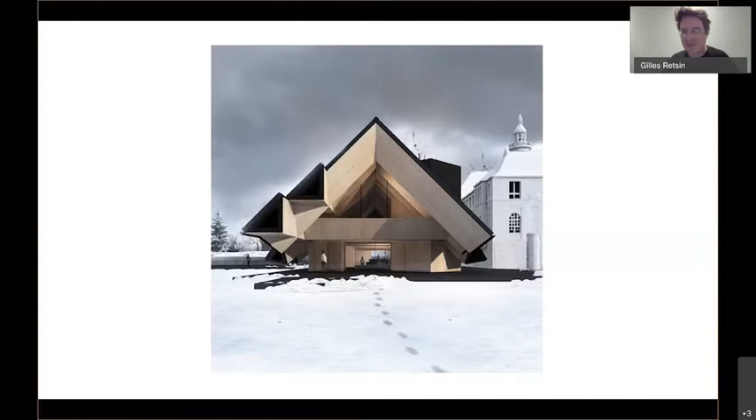Like this is another argument, which I think by now you can make yourself, right? It's a roof that is not a roof. This is not a pitched roof. This is just an assembly of parts. This is actually the same project as the concert hall, it's just rotated 45 degrees. So if you tilt your head 45 degrees, you have the foyer of the concert hall. It's the same project. There was a museum in Helsinki. And this is, I'm just flipping through this in 1 minute.

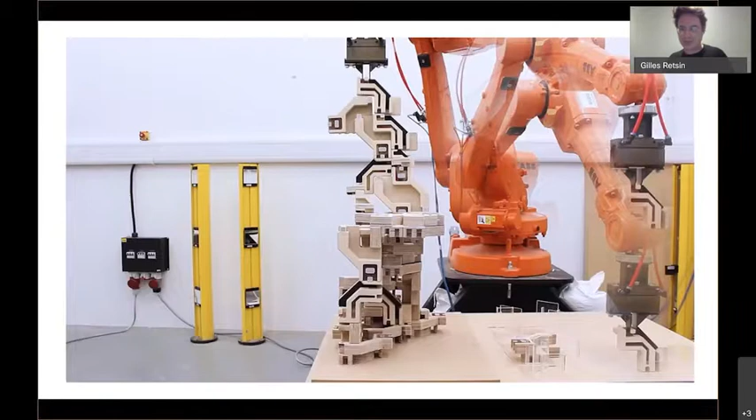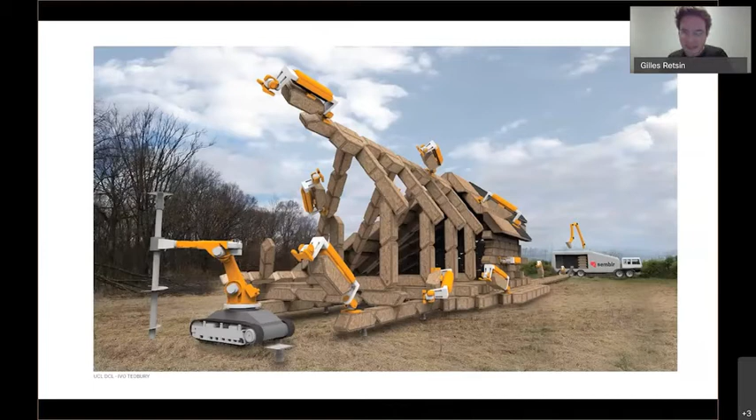This is then, you know, the work that we do at the Bartlett, where we have the opportunity to look at this work in 1 year long research projects, where we actually program the robots to assemble all of these building blocks in a fully automated way, where we devise these kind of little robots that can crawl over structures, that can assemble these parts. Sometimes the blocks themselves become robots. So we have parts that are actually robots that can assemble other parts.

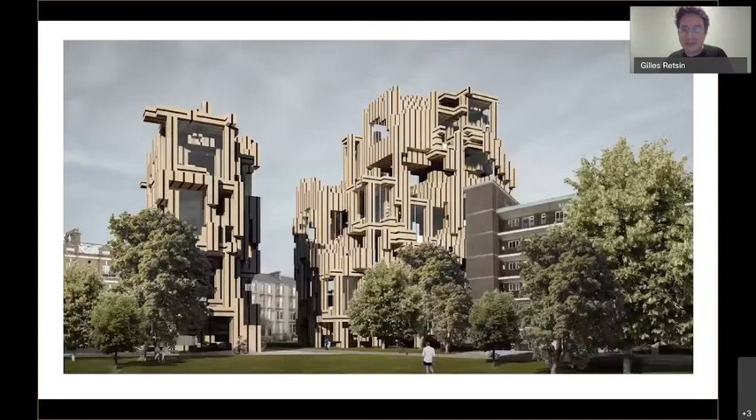We do these experiments where we throw together with robots these kind of massive chunks. And again, you know, experimenting then on housing, because that's ultimately where we think that this technology is very much needed today, is in disrupting the global housing crisis and the way that we are kind of stuck in inhabiting difficult spaces.

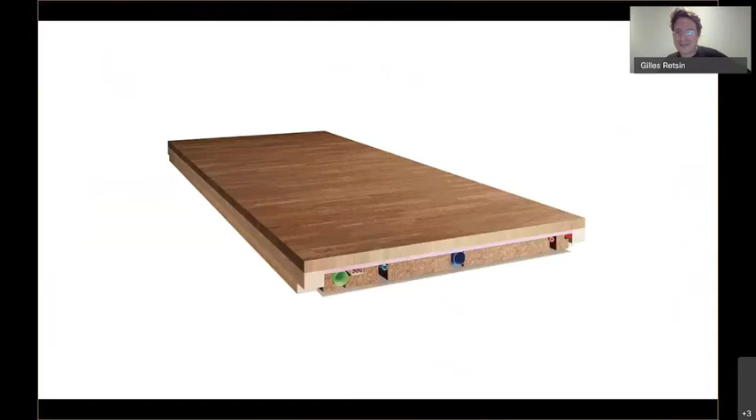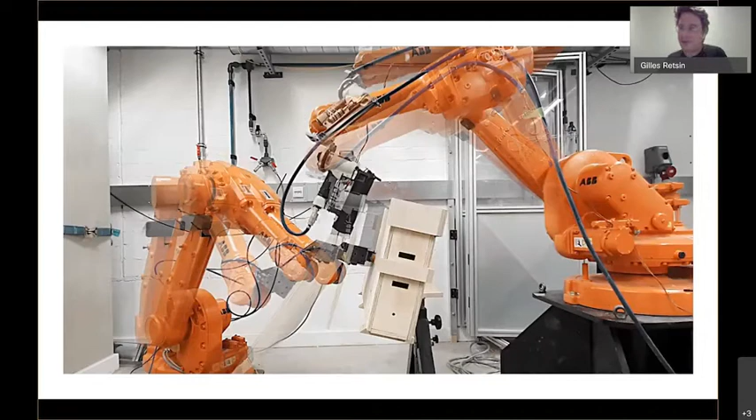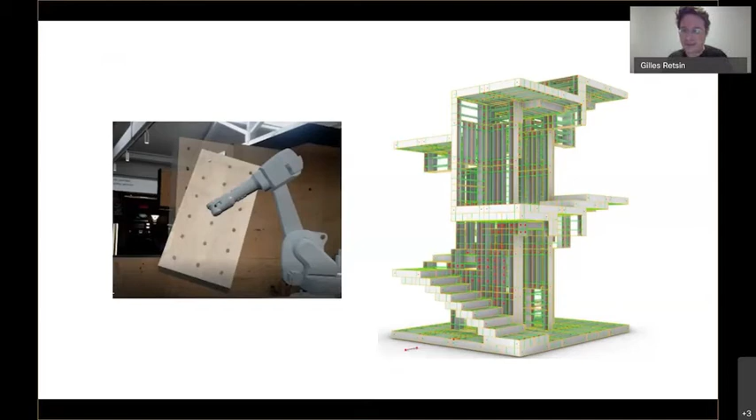So if you want to learn more about this, I will skip the politics chapter. That's usually the chapter I start with. So this is the very first time ever in a lecture that I skipped the politics chapter. You can watch maybe some of my older lectures to learn more about how this work wants to also investigate arguments about ownership, about robots, about automation, the impact of automation on society, and how we hope ultimately to instrumentalize this work to in a way disrupt fundamentally the way that we construct housing. We want to create our own housing platforms where we would be able to create higher quality housing in shorter times, bypassing the entire construction industry.

Because ultimately, and that's maybe my kind of schizophrenia as an architect, or my kind of internal conflict, is that the first part of the lecture I show you is all about architecture. But ultimately, the premise of the work is that we have a short production chain where we can produce extremely efficiently, extremely economically. We are able to create environments that escape the kind of rational, non-inspiring, boring architecture that we associate with modularity. We can push the efficiencies of modularity into a much more inspiring world.

So ultimately, what you need to do with this stuff is not funky concert halls and funky museums, but we should do work for the 99% of housing with this. That is kind of what we want to do. The museums help, I think, as experimental projects that help to generate ideas. But we need to use this for the many, not for the exclusive project.